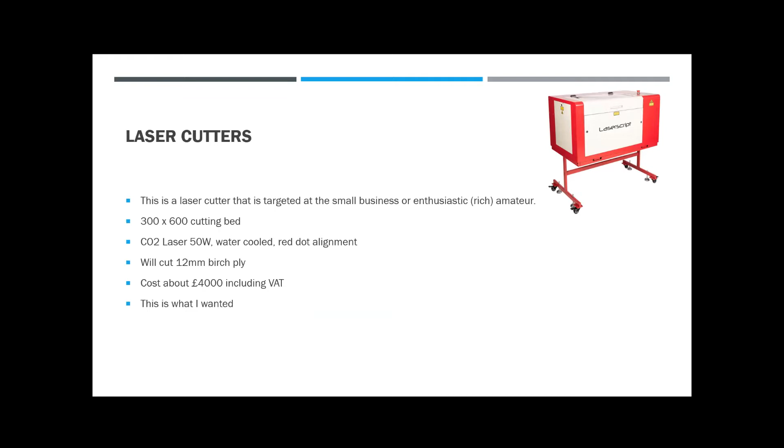Right, laser cutters. It happily cut 12mm birch ply, and it cost about £4,000. And I'm sorry to say that comes in out of my price bracket range. That's what I really wanted. That's what my dream was.

And this is what I got. It's got actually a bigger cutting bed. It's got 500mm by 600mm bed. It's got an LED, and I put in quotes, laser diode. There's no such thing as a laser diode. It's just a very, very, very bright diode, but it is not a laser. It's 3 watts power. I mentioned that these things arrive in kits, so you've got to put them together.

Without instructions, it didn't take long. It took me a couple of evenings, and it's very simple. It's what's called an XY frame. There's a head on it, which you can see in the center of the frame there, which carries the LED laser, and that runs along the rail on the top, that's the X-axis. And they've got the 2 rails aside, and that drives the Y-axis. It's a two-dimensional laser cutter, and that's what I got.

And I put it together, and I had a play with it, and had a bit of fun with it. But I was having a lot of problems, and it wasn't straightforward. Now, this is the difference. This is the £4,000 difference between the two.

An expensive, proper laser has a fixed laser source. It's basically excited photons held in a CO2 plasma. It generates a highly intense parallel beam of light, and it's basically reflected off a moving mirror. So basically, your beam comes out, hits the mirror, points down, and it basically cuts in a very parallel beam, a very narrow parallel beam through your piece of wood. The width of the cut is probably about a quarter millimeter.

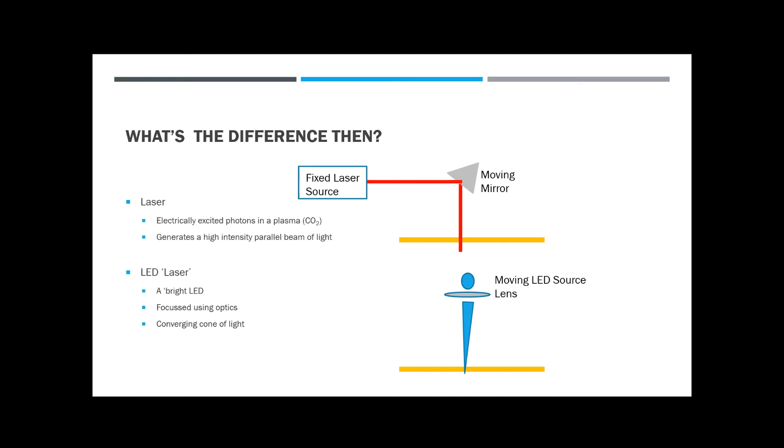So getting this thing going, well, it arrived as a big box of metalwork and plastic and things like that. These things usually are very nicely all CNC cut. And it took me a couple of evenings to put it together. And when you get it, you actually get a nice piece of software which allows you to read an image, for example, like from a PDF or from a JPEG, and it will burn it onto a piece of plywood or something like that. The picture, it's an engraver.

It basically engraves an image pointing from the image that you selected through the inbuilt software. The problem with that is it's not really much use for CAD type work. Now there's GRBL, we'll talk about GRBL over and over again today, but GRBL basically is the software that actually sits on the laser cutter itself.

And it's important because it actually talks in a language that can be spoken to by a CAD program, using something called G-code. Now I'm talking this backwards, don't get hung up about the names if you're not familiar with this, it doesn't really matter at this moment. The important thing is that we had to upgrade it so that the firmware was running GRBL.

I then took it apart. It was a bit too big for what I wanted. I haven't got much space in my shed, as I've got to walk around my shed later on. So I cut it down, so the bed size was now 600 by 300. It fitted a lot better.

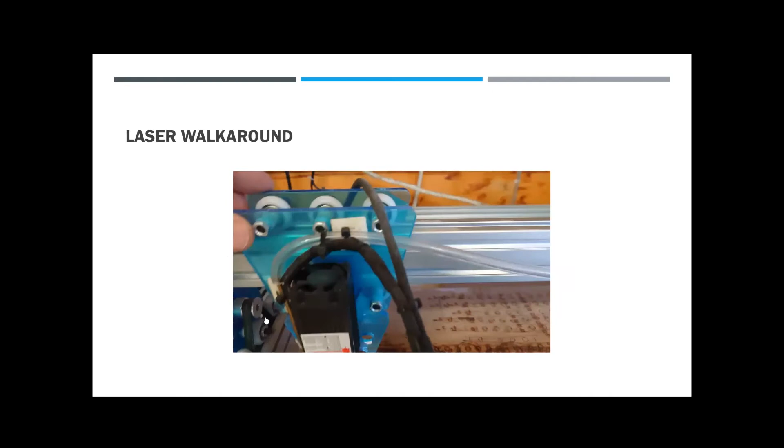Can you hear the audio? Yeah, we're still on your PowerPoint at the moment. Yeah, we don't have the audio, Martyn. Sorry, say that again, Graham. We don't have the audio. You don't have my audio. Is the volume up, Martyn? I'll walk it through, you can hear me, so I'll walk it through myself.

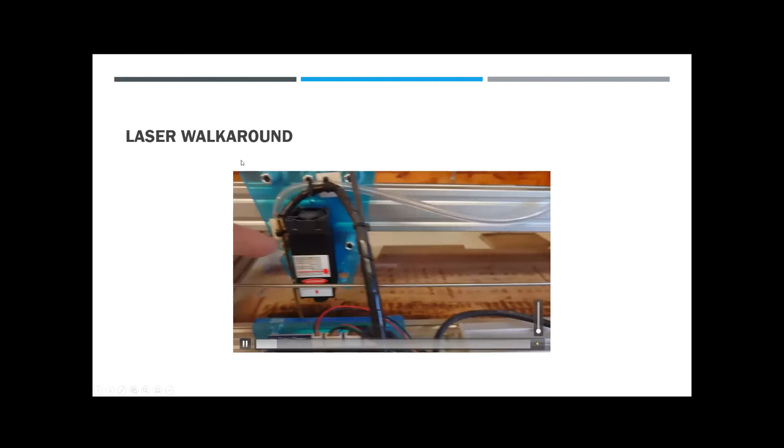Okay, we're basically up to, I'm making a walk around to see what it looks like. I'll just run backwards so I can talk it through. It's an Arduino processor, I'll turn the audio off here. Basically what it does is drive the 3 stepper motors, and it drives the laser head there.

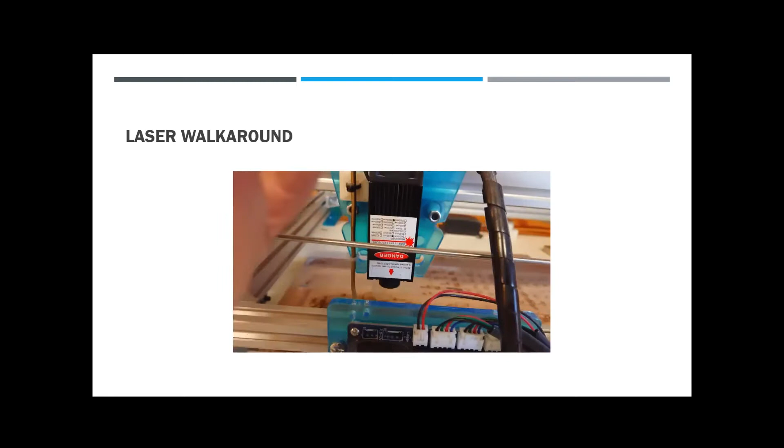The laser head goes down to that silver box you saw before, and there's a laser power supply, and the area there is now a stepper motor. It works on a carriage that drives across the X-range on this aluminium channel.

What you probably can't see from there, but I'll show you in a second, is basically it sits on a series of pulleys, so it runs very, very smoothly. And there's a belt that drives around it and goes around the pulley underneath it, which is round on the stepper motor, so it goes backwards and forwards.

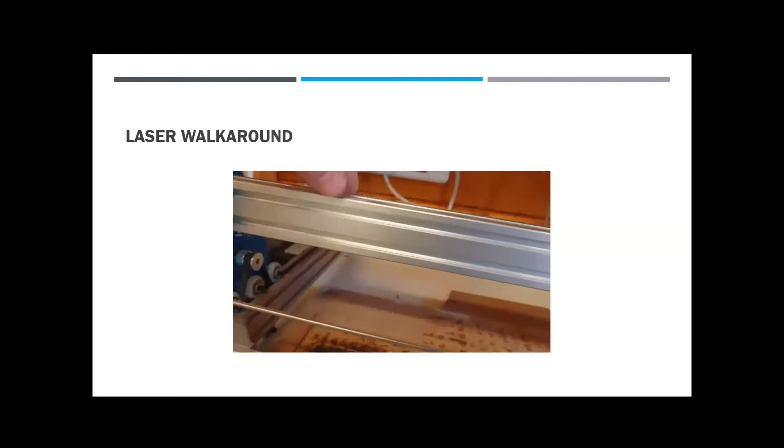Looking at there's a stepper motor for the y-axis, a stepper motor at both ends. You can see the tooth belt, although it's pointing downwards, goes round the pulleys, round the gear wheel at the top, down through the second pulley, and goes through the ram. So it then moves backwards and forwards, which I'll show you in a second.

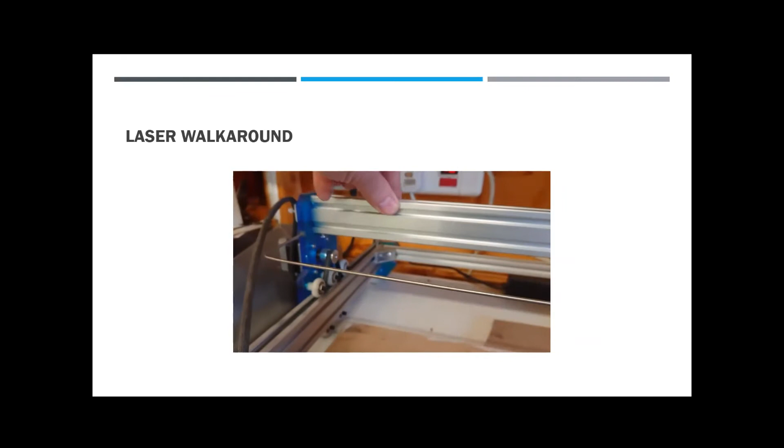Okay, and while it's doing that, there it goes, backwards and forwards, and you can see the stepper motor would drive it across. The stepper motors have very fine steps, probably 1/10 of a millimetre per step. That's showing you the other one. The bit of wire you can see there is my very crude cable guide to stop the wires falling in front of it.

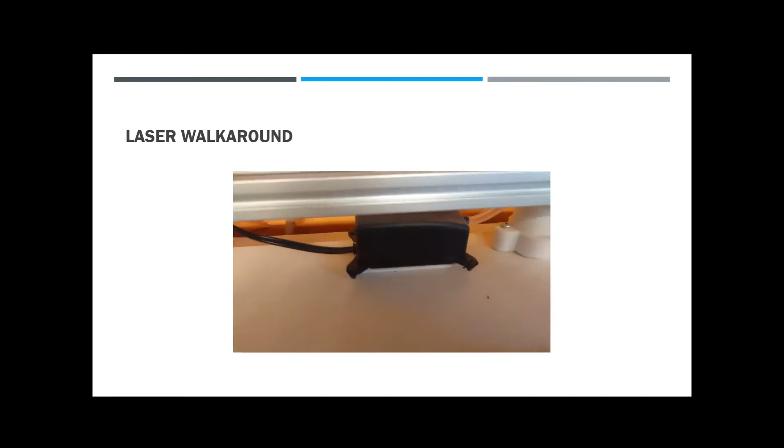At the back there's a little fish tank aerator, which has cost me a couple of quid, £3.50 I think it was, from China. It blows a very minute amount of air. It's called air assist in laser parlance, but much more. Blows the air down this little air tube.

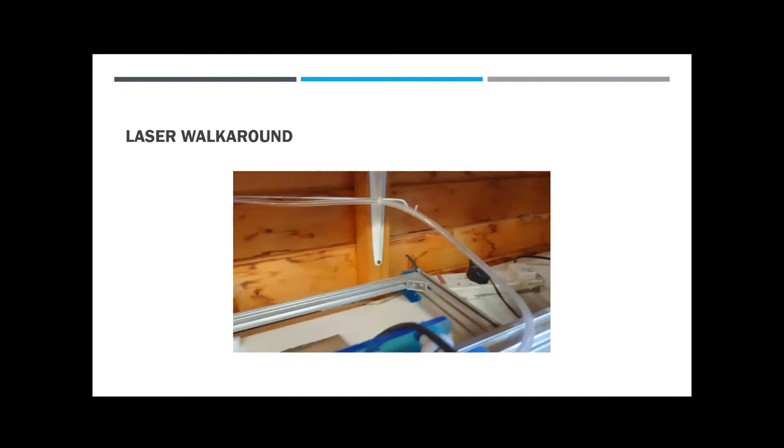I've got a 3D printed little pivot point down there, and it comes down through the brass tube, and it blows air out just in front of the laser cutter point, and it clears the smoke very, very effectively. It really does. It's so effective, if you're cutting tissue, it'll blow the tissue away. So it doesn't need much of a waft, but it's still quite effective.

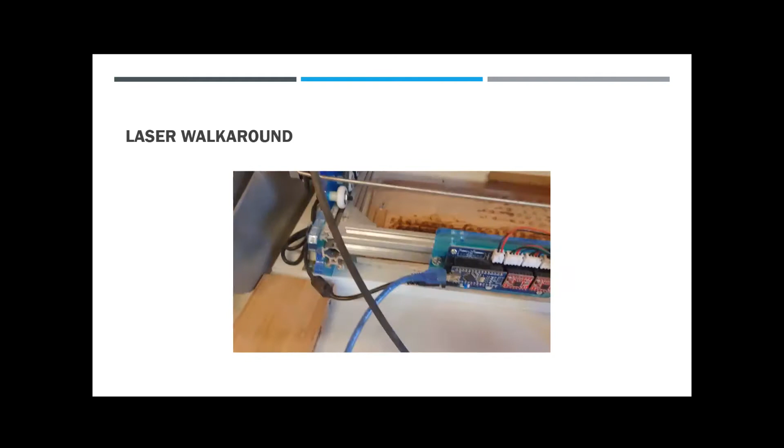And that's it. It's really, really very simple. The important thing to realise is there are no end stops on it, no micro switches showing which the home positions are. You can see at the bottom on the sacrificial board, I've actually used it quite in anger, and you can see I've gone quite cleanly through the balsa without any problems at all. It really does work quite effectively.

So really that's basically about it. It's connected to the PC through the blue cable there. This is a standard USB cable. The PC's there, you can just see it on the desk in front of me. And roughly that is just about it.

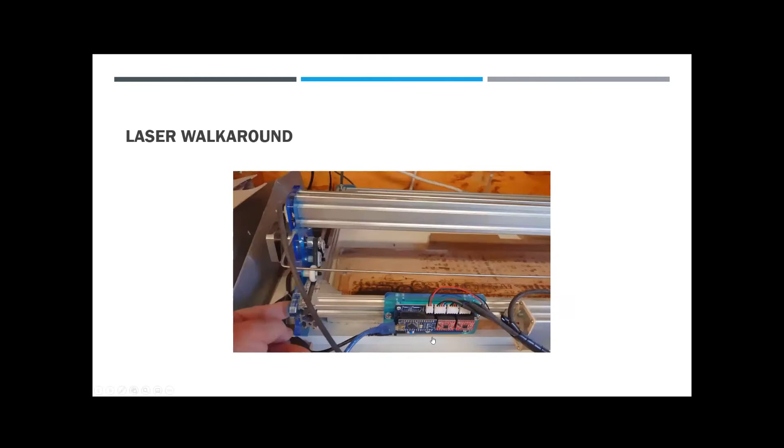And I can't think of else I'm saying now, so it can't be that important. I've covered most of the points. So I'll kill that one.

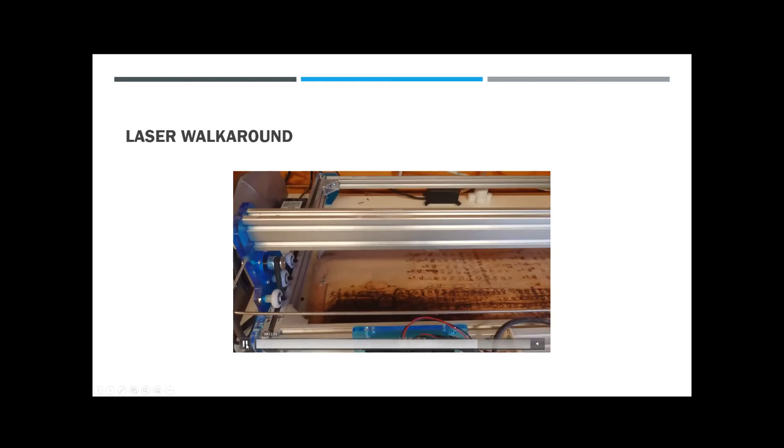Was that come across all right? Did you get the video okay there? You can nod, shake your head. I don't mind. Yeah, great stuff. That was good. That's great news.

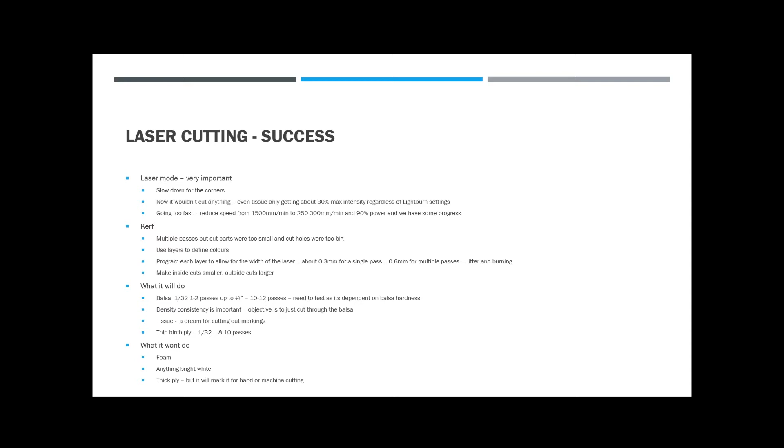So there we go. Moving on, looking at the software.

First of all, let me have a quick pause for breath. Any questions anyone would like to ask me about setting up a laser? We'll come back to it a bit more later on, I'll cover it, but if anyone has burning questions, fire away. Now's a good time before we get into this.

No? Martyn, you talked earlier on about using the GRBL language to get the Lightburn program to talk to the laser or the diode cutter. Could you just go over that a little more slowly, please, as to what the problem was and what you had to do - not in detail, just a bit more slowly so I can understand. Right, like I said, I'm struggling to hear you a little bit, Doug.

But on the laser, when you get the LED laser head, it comes with its own lens, and that's all I've used so far. Focusing - there's a focus option in the software which will actually bring you down to a point. You look downwards and get the smallest point you can find. Am I on the right wavelength here, or have I missed the question completely? No, I think you're going the right way. Okay, there are other lens systems you can buy for it, but I haven't experimented with them yet - that's something I'm looking at. Right, okay, well you've got your sharp point there.

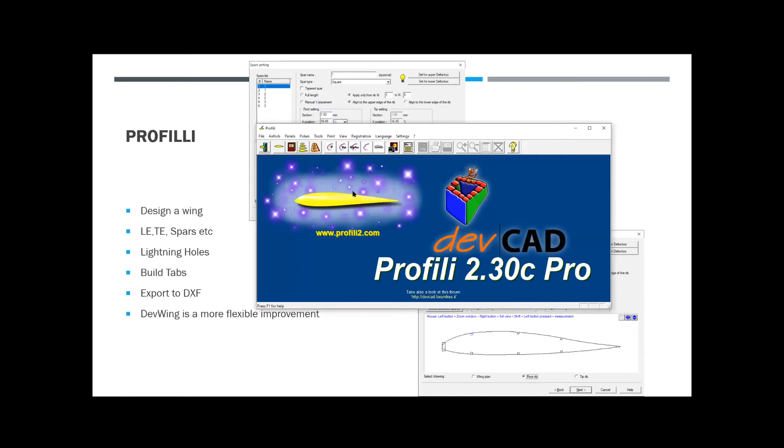Right, can you see the DevCAD? Yep, we can see that. Yeah? Yep, great stuff, that's right.

So here we are, we'll start off with that. I'm going to pick out a panel that I've used. Those who've been following the Big Firedoll's cook-up on Hip Pocket Aeronautics will be aware that I'm building a Bok, a Russian 1938 design. So I'm going to use this as a sample.

It's a peanut model - a big peanut because it's got no tail. It's a tailless model, and I thought that looks like a bit of fun, so we'll open this up. These are all panels I've designed and built over the last few years - there are quite a few in there. I'm quite familiar with this, and it's a rib panel.

You can do foam panels as well, by the way, and it'll create templates for a foam cutter if you want to use it, if you've got a foam cutter.

So we'll start with the Bok 5, and it's a tailless aircraft. What you do is you put in your panel length. It's 185 millimeters long - this is half a wing. The root chord is 152 mil, the tip chord 52, and we've got 100 millimeters of sweep back.

I'm actually building in 3 degrees of washout, and the program will do all that for me. I'm not going to change anything, I'm just going to walk through the steps to use this.

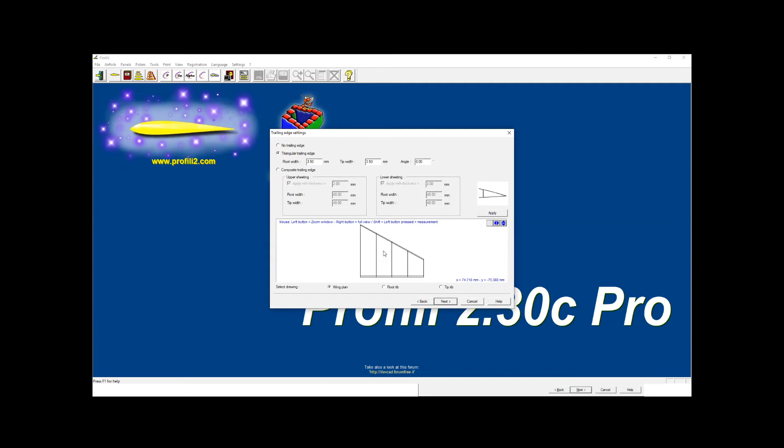Moving forward, I want a trailing edge on this. Now, the original trailing edge, which was a big mistake on my part, was a 3.5 millimeter wide triangular trailing edge, which is really far too narrow for this section and the size of this wing. You can see there's a tiny little triangle at the back end, which is roughly the trailing edge - it's a bit of a nightmare to try and keep this wing flat. A bit better on the wingtips, but too small at the root rib. But again, I was trying to follow the original Bok 5 plan, which you'll see later on.

We've added some spars - I've got 6 spars in this. I basically said I want them to go from rib 1 to 5, but on 2 of them, which I think is 5 and 6, because the wingtip section is a little bit narrow - there's a little bit of a gap in there.

Now, what this does is it actually draws the spars all the way through, even though we're only looking at the tip rib - I've actually stopped it at rib number 4. So that one is 4, you can see that's 5, that's 4, so that one and those 3 I stopped. It's just too thin at the wingtip to have a reliably supporting wingtip, because it's got to hold the tip shape itself.

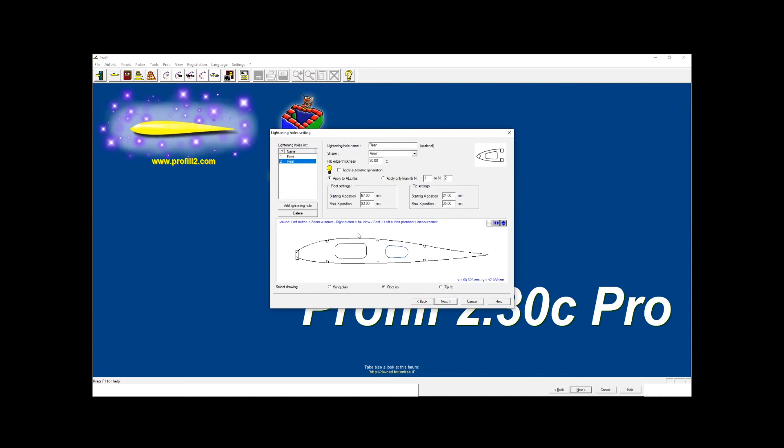I can put lightning holes in. This is one of the great benefits of this - the lightning holes are actually quite useful. We're talking about indoor models now, and I've no problem putting lightning holes into a piece of wood. I've tried building models with wrapping pieces of balsa in an arc over a sub-spar, and I never got on with it - I found it a real problem. But I can set the size of the lightning holes, and that's how I did it. I'm looking at keeping an edge thickness at 20%, so 20% of the thickness of the rib at that point, meaning 60% of that is a lightning hole, same at the back. I can set the start and finish position and so on.

This gives me something with a bit of stability around where the spars will be, and it adds a little bit of benefit. Again, looking at the tip section compared with the root. Moving forward.

I didn't put any building tabs on this. If I wanted to, I could put a building tab in, one right down lower, and I'll put a building tab in there. You can see why I didn't bother, because it would be so narrow. The building tab is, of course, very, very handy for making sure the wing stays flat.

Bear in mind, this has got 3 degrees of washout built into it. So the rib at the center section actually has a tiny building tab on. At the tip, we've got 3 degrees of washout built in, so it's actually holding up by 3 degrees. I think that makes sense - I hope so. But that's where you put the 3 degrees in. I didn't bother with this though, so I propped the washout up myself. It just wasn't worthy of it for 5 ribs.

And that's it, you've done it. You can now have a look at what you've just drawn. I've done this one before, and I can now see there we are with the 5 wing ribs. This one, because I've mucked around with it, you can see on the top up here that I've got 3 spars there, where I've got 6 spars at rib 4. So that's where it's come through. And that's it, done. I've just designed a very simple wing - very simple, very straightforward - and it works really, really quite well.

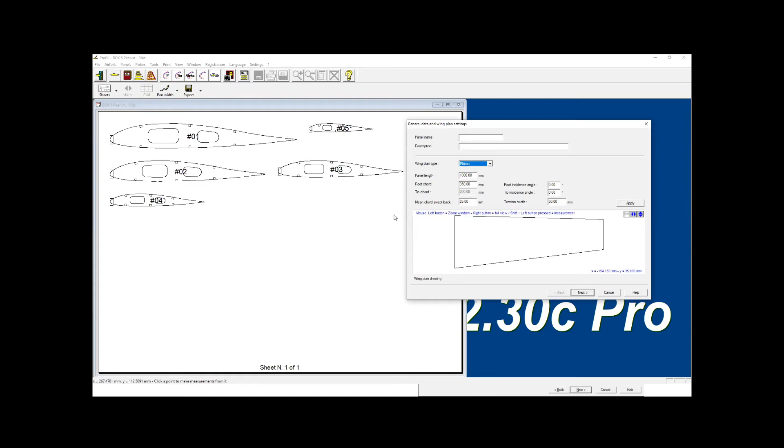I don't know how accurate that would be. I haven't tried it, but I have done elliptical planforms before. You can do ellipticals, but they are pure ellipses. No, I'm not going to do that now - that's for another time if you want me to do that.

So I'll abandon that - that is basically PROFILLI. Close that down, get rid of that, and that's gone. So we've got back onto this one, and we've done PROFILLI.

So moving forward, DEVFUS. Now DEVFUS is another one from Stefano's stable of applications. He's basically got a CAD suite, which he promotes, and all these applications integrate very nicely into it. I never got on with his basic CAD applications - I've always preferred AutoCAD because I've been using it quite a long time. I find it, probably like most people, very difficult to change from one system to another. It's like trying to fly mode 2 and then expected to pick up a transmitter and fly mode 1. Some people can do it, some people can't.

So this is what this is. Now this is again part of the DevCAD suite. It's all about fuselage design, and this is very, very much more sophisticated than PROFILLI, even though it's from the same stable. You basically build a structure. It's quite intuitive how to use it. So let's have a go with this.

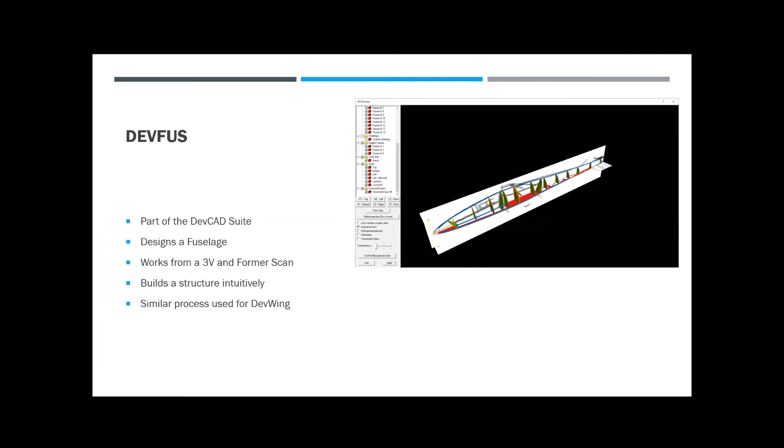This is - here we are. Again, I've been playing with it for quite a while now. I've got one or two bits and pieces - I've got the GAL 56 in there just to show what the fuselage looks like. And you can see the wing section I was using before for the Bok.

But we're going to go with the Fokker. The Fokker is a quarter scale glider I built. It took me about nearly 2 years to complete it. No, I wasn't working on this the full time - it's one of these things I kept picking up and putting down and picking up and putting down, as modelists tend to do.

But it unfortunately had a very sad ending when the half-inch carbon wing root joiner failed while I was on an aero tow. I got catapulted into space by the tug, and the wing joiner failed. The wings didn't fail - the wings were fabulous. The joiner failed when there's impact on carbon - they don't like it, and it came in from 1,000 feet. A 5 kilo glider went down into a field of maize. It took me a week to find the bloody thing. Never mind anything else - but anyway, that's my confession for today out of the way.

We're going to walk through this one, so we'll do a double click on it. I'm going to move this across to over here - we'll start off with it. Things are a little bit more important now. We've got a project name, which is Fokker 4, a fuselage length, and this is taken from a 3-view which I've imported to CAD. So I've scaled the 3-view up - I'm working with a small 3-view, but now at nearly 4 meter span and 1.7 meter long.

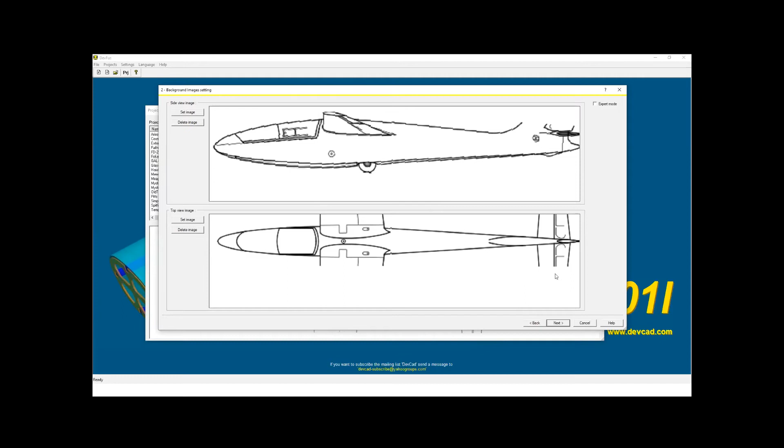And then what you do is you basically trace it. I went a bit quick through - I'll go back again. You edit the outlines graphically, so what we do is draw lines around this. We put these little blue anchor points around the line where we want them, and we see the blue dotted line going across. The red line there is the datum point.

And underneath here is a skid, by the way, that's why I've ignored that. So that's the side view, just drawn out, including the tail cone. And then looking from the top view, I can do this only on one side because it assumes the fuselage is symmetrical - so if I pull this pointer here, you can see it bends both sides. Okay, so that's all you do.

You just drag them, move it to about there. That looks a bit better. We've now got a line there.

If I've got an awkward shape, I can add some more anchor points in and move them in, or I can put right angle points in. These ones at the back end are right angle points. So for example, here at the nose, to get that sharp curve, it's a right angle point.

You can see I can alter that, and it very nicely moves the shape, moves the position of the curve so it follows the curved line. It's a bit like a French curve, probably the best description I could put to it. It takes a little while to get used to working it, but this is quite a simple shape, and this is why I've chosen this one.

The gull was really quite difficult to do. It was very, very complex.

So we've agreed that we've now got our lines drawn into that, so we move forward and we're creating a 3D preview. I'm not going to bother with 3D view. We're creating a set of formers now. What I did was then get a set of formers.

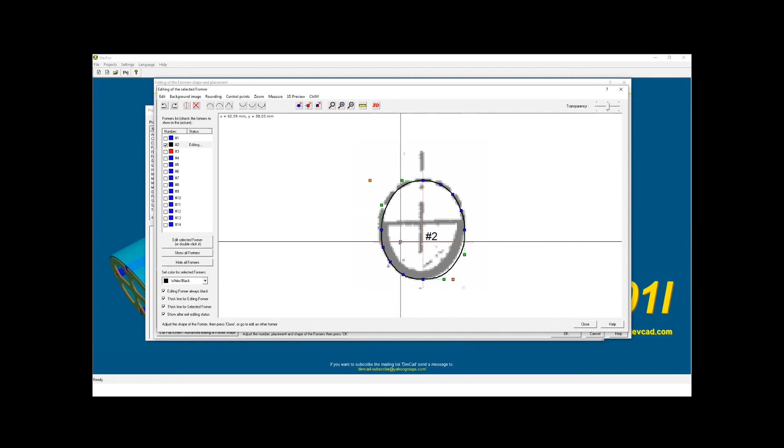And you work your way through this. Now, I put, I think, 5 formers in there, but I actually specified I wanted 14 formers in place. And what it does is actually interpolate the shape of the formers in between, so some of these that I've created have actually been created by the software.

So it's really quite nice and quite tidy the way this gives you the cross sections all the way through in far, far more detail than you'd ever get from a 3 view. And you get a feel for it, so you know whether it's right or wrong.

So we've done that, we've imported the formers, we've drawn around them, and we've now got a shape that's in 3D. We can look up here, there's a 3D switch here, and we can have a look at it. I'm just going to bring it up, drag this up to the top. Okay, and here we've got the formers in place.

You can see my top and my side angle, and if I turn the raster plans on, if I say put the formers on, there's actually more than I thought on this. So I'm turning it on, you can see now which ones I've actually used to generate the manual ones.

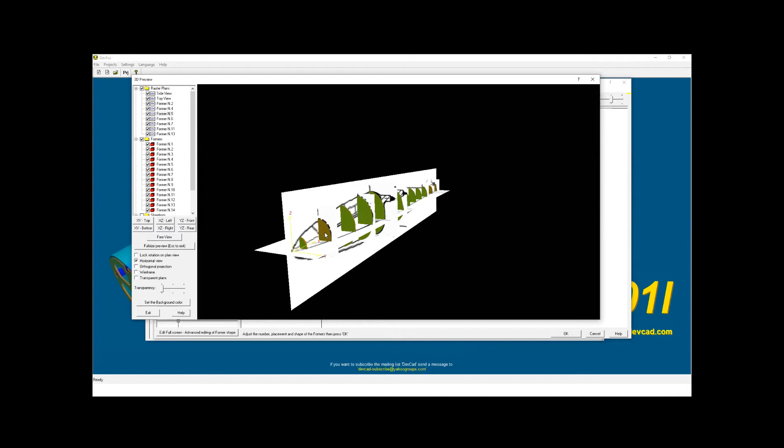So that's a manual one there. So turn the formers off, you can see them there, those are the cross sections which I worked from. One at the tail, one just in front of the tail plane, then we've got the 3 around the wing section, and then around the front, around the cockpit and to the front.

So we'll turn the formers back on again so we can see what we're looking like. And yeah, to me that's looking pretty good. Certainly for the level of scale modelling I'll do with a quarter scale glider, that's more than good enough. I'm not thinking this is ever going to enter a competition or anything like that.

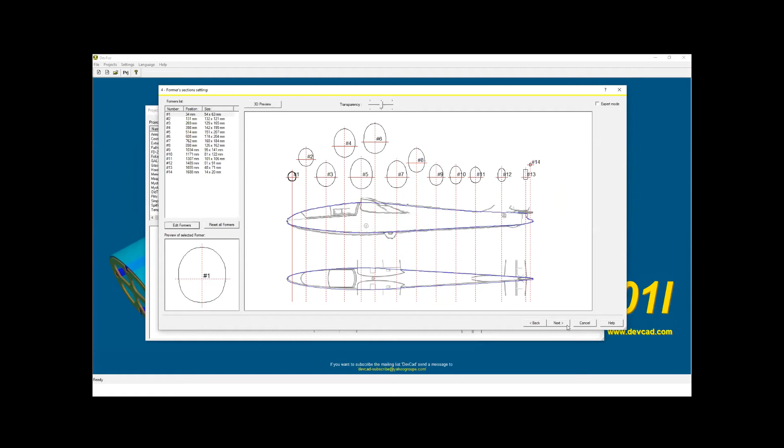So we'll get rid of the 3D view, click OK to that, and we'll move forward. Every time it's updating, regenerating the 3D view. Now, we want to set the former thicknesses here. It defaults to 3 millimeters, 2.5 millimeters. They're all 3 millimeters, except this one here, number 6, which is where my wing joining tube will go.

And it's 12 millimeters, so I'm going to put my wing joining tube slap bang through a former, so it holds it nice and rigid. So there we are, quite simple, straightforward.

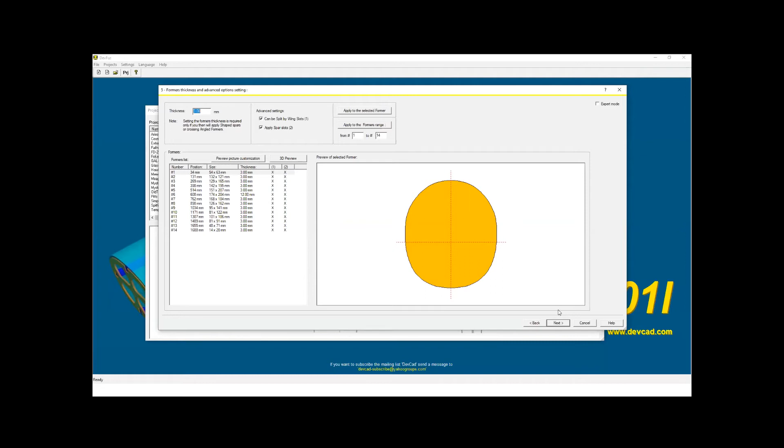Then we're going to put some sheeting on this now. Again, we've set the width sheeting. I decided to go 3 millimeter balsa. It's probably an 1/8 balsa, which is slightly more, but by the time I've sanded it down, it'll be a bit narrower than that, and it's just a uniform thickness. You can do all sorts of clever things with this by the setting about it - you put tapered sheets in here and there and everywhere. But again, not for today, not for today.

Again, you can look at the sections all the way through, what the relationship is, so you can see it now coming together. Okay, at the moment, no cockpit - we'll do the cockpit and the wing section later, in a moment. Moving on.

So, let me just have a quick sip, if you don't mind.

Okay, what I want to do is put some angle formers in here. Because my cockpit area is angled, I put in a pair of angle formers. So we're doing the setting now with the boundary of the cockpit front and back. And also I put a former here, behind the wing, linking the wheel area, and it's just adding an extra level of stiffness in that area which I wanted.

Bear in mind that the wing joiner is sitting through number 6, and it just adds a little bit of stiffness in that area, so you can see what happens - it actually calculates the shape of it. So there we are now with number 1. It knows it's going to cross through former number 2, so it cuts a slot at the right position. Now, I don't want the bottom bit of that former, I just want the top bit, so I'm going to cut it nonetheless.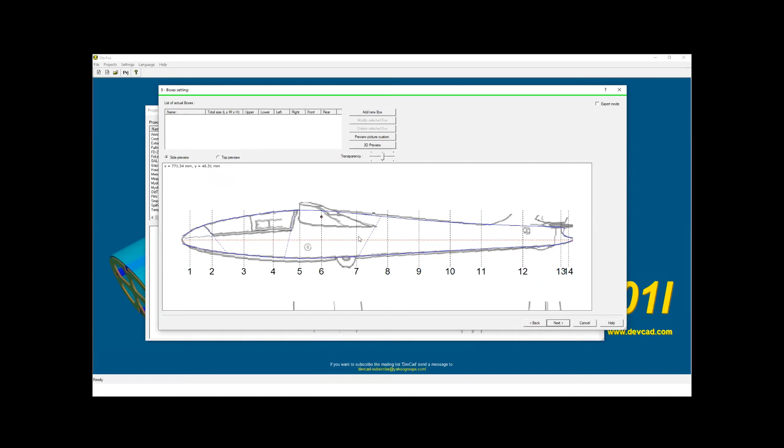Moving forward again, we're moving slots, lateral sides form across there. I'm not using lateral sides in this because I sheeted my thing top and bottom, so I don't have to worry about putting fuselage sides in. But it will still calculate a hypothetical one, and you can see it sees a very tiny side that it could generate if you wanted it. I'll just ignore it, I don't need it.

Lightning holes - why hasn't that come up? Oh, that's the lateral side, sorry.

Right, next thing to do, we're putting quite a few stringers in this now, or he calls them spars. Basically what you do is use the generic spar generator. I'm not going to create one, but we'll just add a generic spar. Where do I want to put it? I'm going to put it slap bang in the centre. It could be quite useful, because if you want to build a fuselage around a tube, for example, to keep it nice and straight, this is how you do it - you'd put a spar down the centre and build it around a tube, so you get fuselages absolutely bang straight all the way down the length of it.

And what we can do is set the size of it, or you can put it on the edge - it tells you where you want to put it. You can line it on the upper side, the lower side, the left, the right, on the outer contour, the inner contours, and so on. Loads of places you can put it.

So I'll cancel that one - I'm going to create one and look at this. I've got one on the top. Let's pick one somewhere in the middle, so this is former number 4, I think. I'll click then. By the way, it's got dynamic measurements all the time - I can measure something. By left click and shift, I can measure something across - 134.97 millimeters.

So on this one I've got a top spar, a bottom spar, which is going red - you can probably see it. If I just zoom in a little bit - there we go, we've got a left one. It goes back every time we do that. Then the left mirrored, so it's the right-hand side for that one.

We've got the cockpit left. What I did was put a spar in to define the bottom edge of the canopy, so the canopy now is defined left, right, front and back.

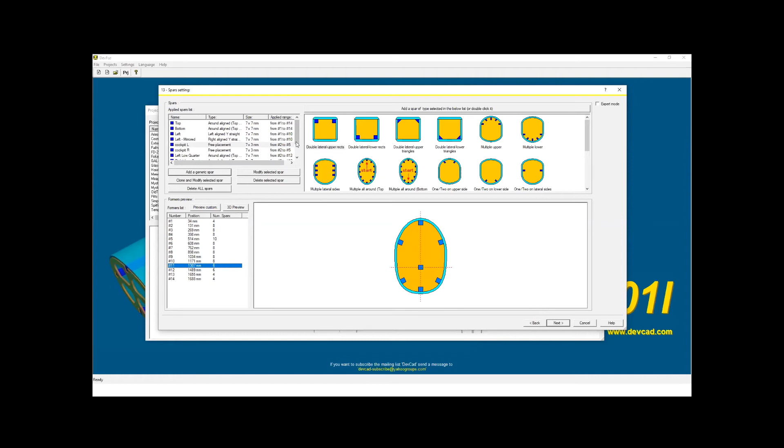I'm not too sure why I've got that one in the middle, but I'm not too worried about it - I'm not going to worry about it too much anyway since I'm not going to finish this. Moving forward, so we've got that.

Vertical decks - you can put a deck in vertically. Vertical and horizontal decks are great for building a structure inside, and that will then generate the structure around it. No vertical decks on this one, but I do have a horizontal deck.

I put a horizontal deck in which starts at 1 and finishes at 12. Let's have a look at it - it's there, and if we look, I've applied a lightning hole to it. This is what the deck looks like - it's calculated and shows you where all the formers are positioned.

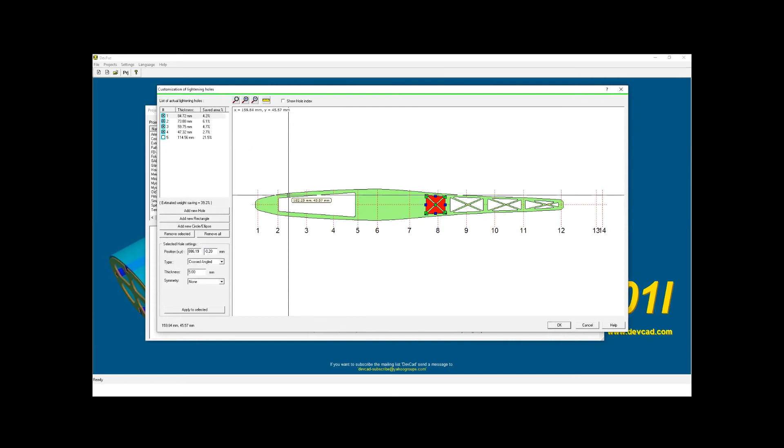I put a lightning hole there for the cockpit area, and since I don't want a load of weight in the tail, I put a pile of lightning holes in the back. If I want to add a new lightning hole, I can do that - you basically just drag it into there, for example, put it central, and there we are. So you can create the holes, stretch it, pull it any way you like. Makes life quite easy - very elegant the way it generates lightning holes.

We'll cancel that one, I don't want to do that. No, I don't want to do that - leave that, just click OK. We'll come back to it later. So that's basically a horizontal deck.

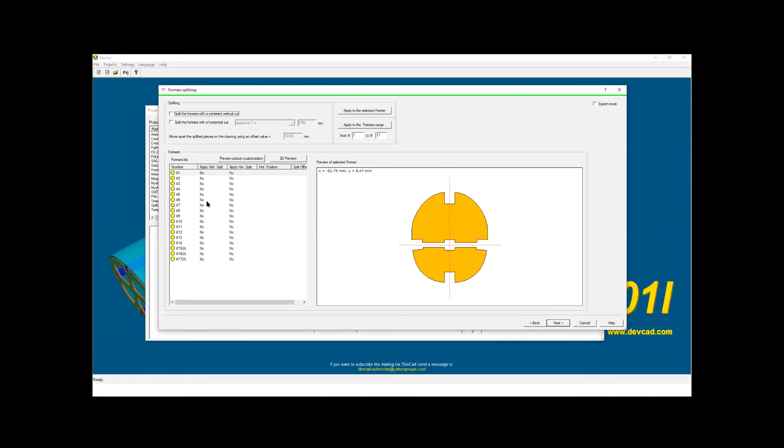So what I've done is let it generate the lightning holes in much the same way Profili did it. It basically puts it in with an offset, so 10 millimeters all the way around, which is the gap. These are all going to be cut in plywood, so I'm not too worried about the fact I've got quite big holes in there. We're trying to take as much weight out as possible.

I think Richard Krapp must be loving this conversation.

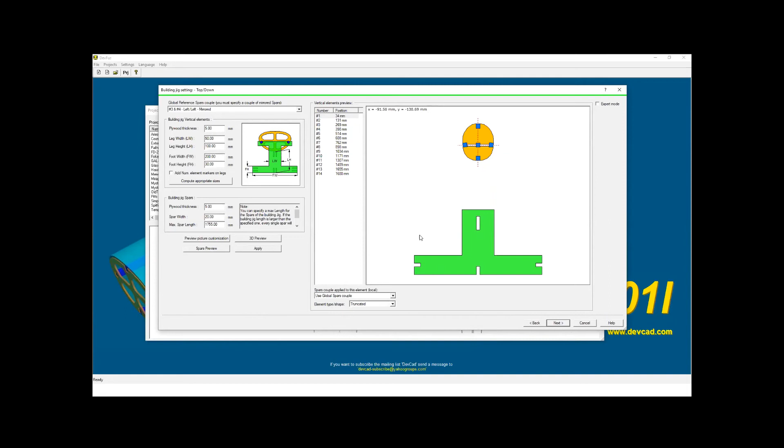And then that's it, we can have a look at the external shape. We'll bring this up to the top, so now we can put the sheeting in place and see what it looks like all the way around. We can hide the sheeting, make it transparent, so there we are, you can see through it. Now you can see what the structure looks like inside.

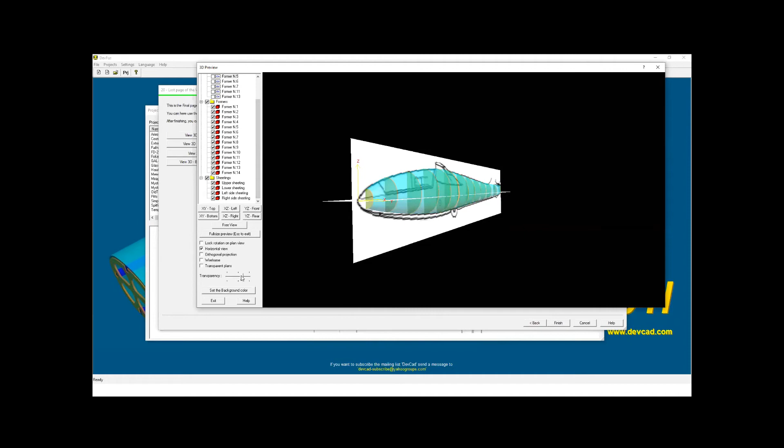What I haven't got in there for some reason is the decking. I can't remember where that's gone to, but I'm not going to worry about it at the moment - decking should be there somewhere. I'm not sure why that's not there, but we'll have to look at it. But that basically shows you it all around, still with the views in place, and that's all I'm going to do with it.

So I'll cancel that because I don't want to change it. That gives you a very quick view of DEVFUS, and it's taking a bit longer than I thought it would do, so we'll cancel that, come out of it and move on to the next one.

Am I driving you cold here, or leaving you dead, or are you okay? Thumbs up if you're happy. No, happy - completely different from what I've seen before, so understanding it better now.

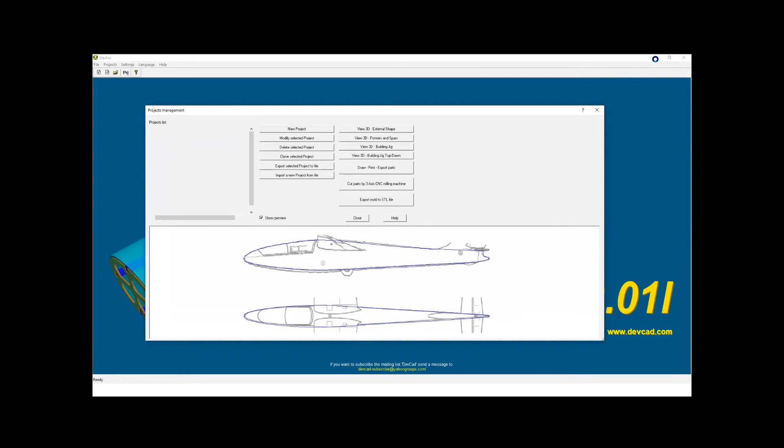It's hard work, I'm trying to keep this going fairly quickly because I'm conscious of the time. That's the reason why. Right, so we're back to the start from there, we'll get rid of that one now - close that and close that, and moving on. Okay, AutoCAD.

I've got AutoCAD set up here. I've used AutoCAD for years, then I went on to a free version of AutoCAD which then became chargeable, and then I found a free version of AutoCAD online. I'm not going to publicize it because it's a pirate copy - so this is a pirate copy I'm using. I shouldn't admit to things like that, but now I'm no longer a practicing IT professional, I can say things like that. But what I'm going to do is just basically show you very quickly what this looks like.

Those, by the way, in front of you are the cut parts I did for the BOK 5. So, right, sorry, I'm getting my breath back. So here we go - why hasn't that gone up? Okay, here it comes, right, here we are with AutoCAD.

There's a 3-view that I've actually already imported - this is the plan I'm working on for the BOK 5. It's one of the weirdest little designs I've ever seen, and I like weird - weird and me go well together. Too weird, my wife would say, but there we go. So what it basically is, this problem with this was that I wanted to cut the parts out using the laser cutter, and I wasn't really happy with the wing.

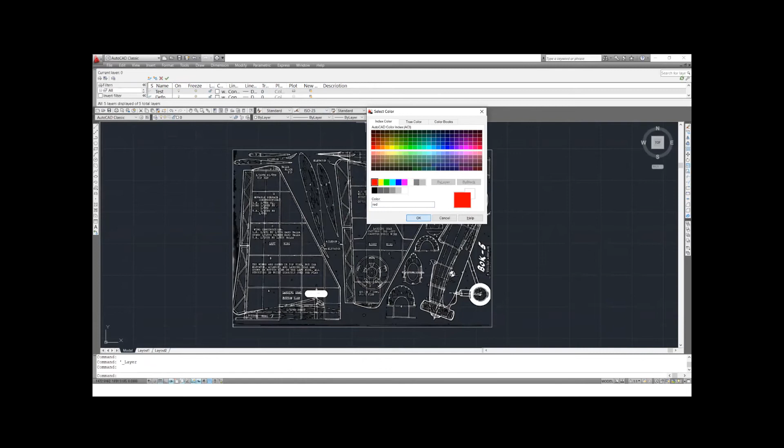And what I'm going to do is give it a color. It comes up in a color picker like this. We'll pick one that's easy to see online - we'll go for red, because I know you'll be able to see it. And that's it, we're going to make that one live. So we're live with that drawing now.

Down the side of the CAD we've got a small toolbar. We're drawing a straight line, so we'll pick a straight line and draw it over there. And like that - if I picked the wrong layer, unfortunately, I should have done the layer. Amazing when you're trying to do things. Escape that, we'll go back and pick my layer out.

Sorry, what would I be doing while I'm in the drawing mode? Here we go, so what I want to do is pick - where's he gone? Apologies, what I want is my layer called test, that's the one I'm using. So we'll select that one and we'll draw a line.

Draw a line now - well, I should have a red line. There we are, we've got a red line. Okay, so that's basically that. We're drawing two straight lines. It's as easy as that.

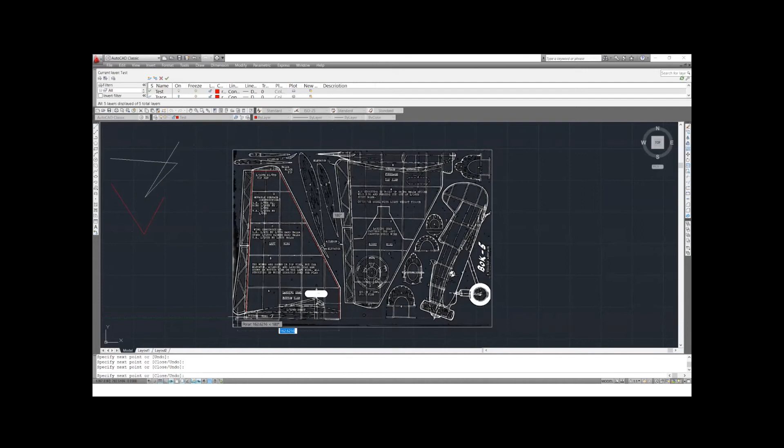So I can now, if I want to, draw this outline very quickly - pick out the point there, up to that wing root there, down to there, across down the centre section to about here. I'm doing this very roughly; I normally zoom in and get spot on. So I'm zooming in to see how accurate I am - I'm not a million miles out, but it's okay. And that's great for drawing straight lines.

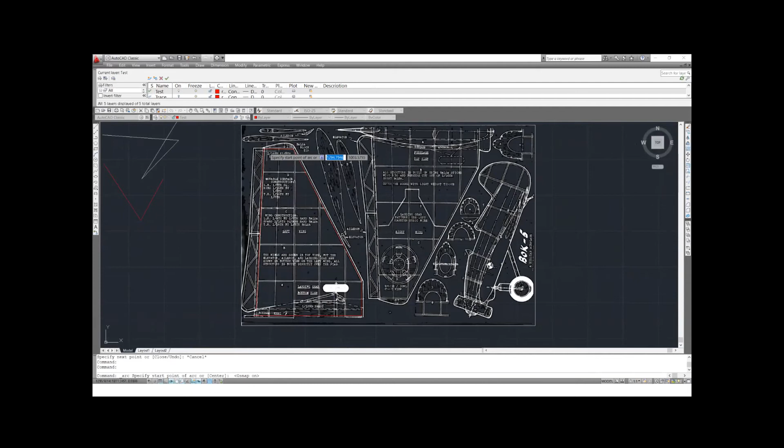If I want to draw a curve, I pick out this other toolbar, called Draw an Arc. Now this has got a nice little feature in 2011 - I can click onto an object, so I want to click on that there, starting from that point. I'm going to zoom into this bit so you can see clearly what I'm doing. Now you can see this is a rasterized program - I'm not going to follow this line exactly because I didn't get it accurate, but we'll say we'll start from that point.

That's the midpoint of the arc, and then we'll do the second point - then we're drawing a curve. And then we repeat the arc again, picking up from the last point, coming round, and drawing it round to there. Then repeat the arc again, and round again, and so on.

You can see what I've drawn, although it's not actually on top of this - I normally draw it straight on top of the line. I've actually drawn a wingtip in three arcs. Can you see that, is that clear enough? Yes, okay, so that's basically it.

Now the question is, though, how big is it? The point about CAD is you don't actually draw to scale - you can if you want to, but you don't need to. You always draw full size. So if you're working on a glider with a 20-meter wingspan, your wing would be 20 meters. The fact is, you've just zoomed in on it.

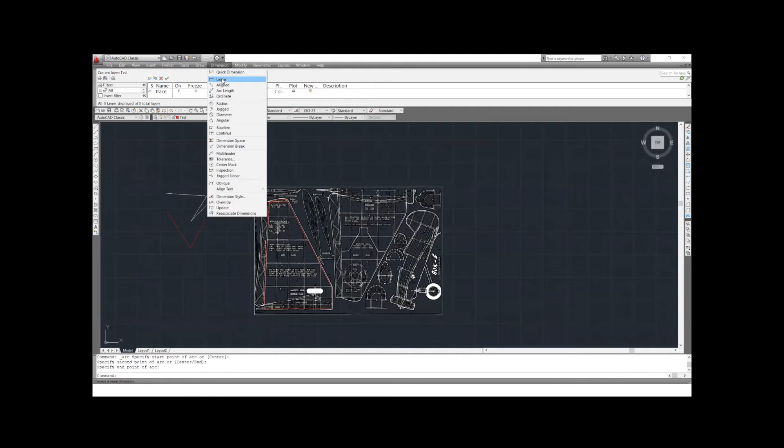So I've got one here somewhere called dimensions, I think - if not, we'll create one. Let's do a linear dimension, and we're going to measure from that point there to that point there, and we'll zoom in. Oh, and that's 152 millimeters. Now, I think that's a bit small, to be honest with you.

I actually want to see this, we'll keep it nice and simple. We'll make it 608 millimeters chord. It's going to be a decent size. I fancy building this for a scale model.

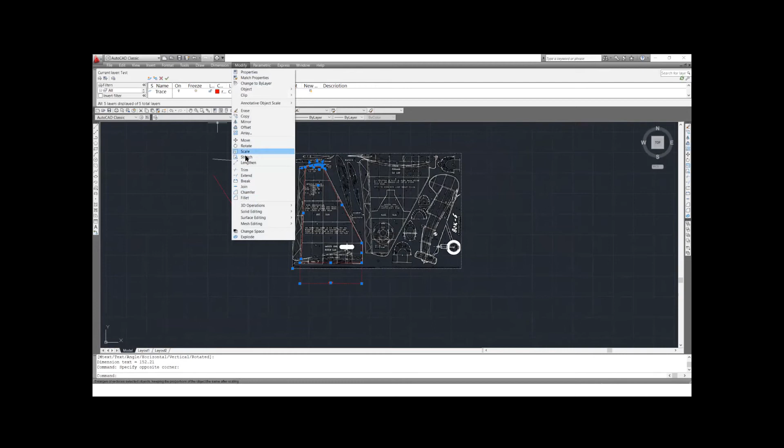So what we'll do, we'll select everything like that. So that's everything in that box is now selected. It's got dotted lines around it, all blue handles on them. And we're going to modify it, basically scale it. We're going to stretch it from this point here, and specify the scale factor. I'm going to make it 4 times bigger. And now we've got somewhere out here.

Oh sorry, is that view, zoom, extents. And there we are. Now I've come down to this. It's exactly the same picture, exactly the same drawing, nothing's changed, but my dimension is now 608 millimeters. So very quickly and very easily, I've taken a small 3 view from which we all work, or a small plan like this, and made it very, very much larger.

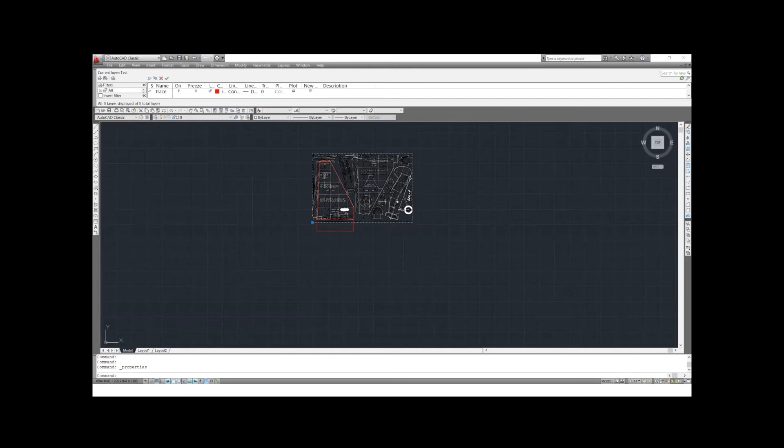The other thing you've got to be able to do is import the drawing. Now this is, if I look at the properties of that, you can see, if I bring this over here - it keeps popping up on my other screen, by the way, this is why I've got to let it come across. Come on, here we are. It shows you basically the PDF underlay, it's called, because it came from a PDF diagram. And it tells you where it is. And all I do is, it's there.

So if I pull this out, it will let me. Okay, it's telling me it's in my Martyn folder, Aero Modelling Scale, Free Flight, Mooney, the Bok 5 Plan PDF. And I just imported it from that, simply by using insert a PDF underlay. Okay, it'll ask me for the path over here.

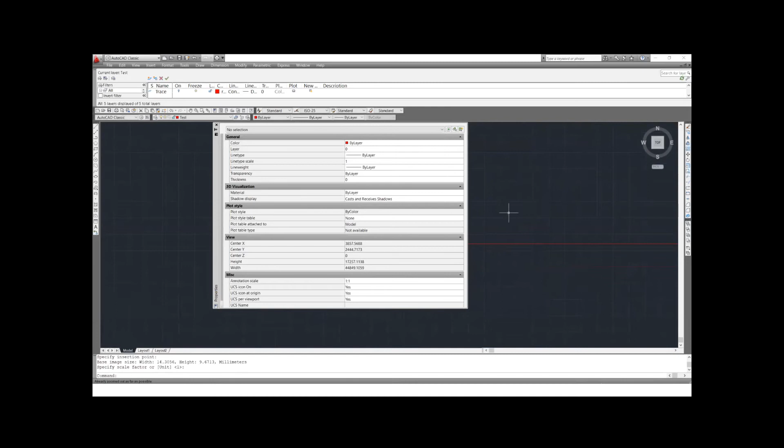It shows me a little preview, what it's going to look like. Where do I want to put it in? Well, I'll just specify on screen. Okay, so I'll start with there, and this is how big I want to make it. And what I've got, if I close that down now, I should hopefully have a very large view - zoom, extents. So we'll get the extent in, and there we are. That's my Walt Mooney baby ace. That was imported, as easy and as quick as that to get that on board.

It really, these modern CAD tools are really much easier than they used to be. When I started working with CAD, it was on DOS-based systems, and they were awful, absolutely awful. Right, that's the end of the quick CAD tutorial. So I'll get rid of that. I'm not going to bother saving it because I don't want to cock up everything I've already got.

Right, moving forward. Now after all this, you can see how I've actually pulled this together. So I basically created, for this test purpose, a very simple drawing. I put it into colours. I picked the wing section from the block, Former 1 from the block. I've got a square, a circle with a pentagon inside it, and they were just drawn by freehand, by the way. And that's what we're going to burn. But I'm not going to burn the yellow ones at the top.

And the reason why I was going to show you setting fire - and I thought, this is a bit stupid, you just take my word for it. It does set fire, you can set fire to it. I was going to go full power on those, and get a real bit of smoke in there. But that would be a bit crazy.

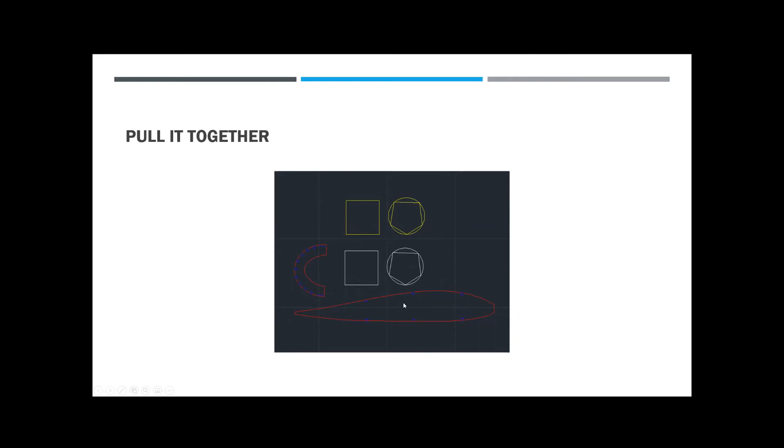No point in doing that. What I've got is one layer of red outline for the outline, blue for the spars and the stringers, and these in white are my test pieces, which I use to test the wood.

So I basically pulled this in. It's a DXF file, I opened it up in Lightburn as a DXF, and that's one thing I haven't got loaded at the moment. I've got a demo version of Lightburn on here at the moment. I've only got one license, and that's on my shed PC. So Lightburn is just loading.

Okay, go back to that. So here's Lightburn. Okay, no, I didn't know that was open. File, open recent projects, and here's the demo one. Okay, you saw me, sorry, I should have opened it, showed you file open recent projects. It starts off as a DXF file, but once you've actually got this working, it actually saves as what's called a Lightburn project. It doesn't break your original DXF file.

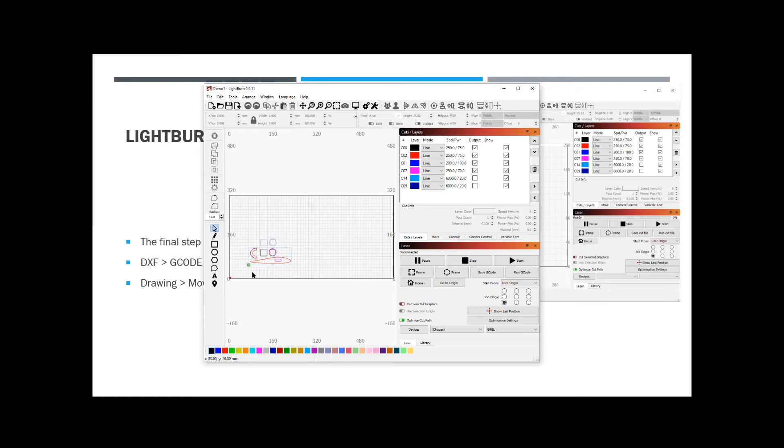So we've got Lightburn here, and what this is going to show you - we're getting now to the fun bits, we're going to set fire to some wood. It creates, remember I showed you about creating layers - well, the great thing about creating layers is now in Lightburn, I want to set these layers slightly different, so I'm going to set the speed and the power.

So double clicking on the color, I can set the layer color, which is black. Okay, I'm going to run it at 250 millimeter per minute, I'm running at 75%. I'm going to cut through mode - I'm not sure what it does in this, I don't think it's anything for me.

Okay, I've got no kerf offset because I'm only using the black one, the black lines here, which are these two here. I'm not bothered about kerf, they're for a test. So I haven't put any kerf in, but I'm going to use 3 passes to test that it's going to cut okay.

If I look at the pink, which is on the inside here, which is the inside piece, I'm going to run this one at 250 millimeter per minute, 70% power. I'm running a kerf of minus 0.4 millimeters, so I'm going to come in almost half a millimeter from the inside. I do not want to touch the black.

One of the things I've learned is we want to avoid charcoal, burning charcoal, because what we leave behind when you cut is charcoal, and charcoal burns very, very well. I'm doing 3 passes.

And on the red, you can see you've got the guide here of it now - 250, 75. The blue ones up here I'm not going to use. I've highlighted these sections, and it automatically defines the start point for the cut. Okay, this is the control panel, if you like.

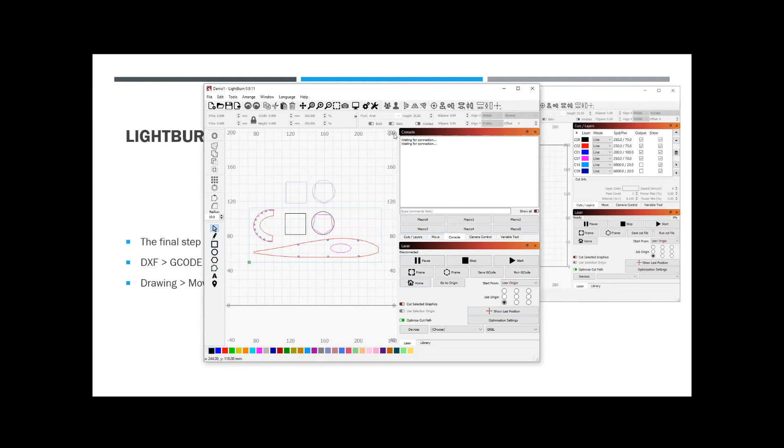So we'll go back to my presentation. So that's a little overview of things.

Now I mentioned G-code. G-code's interesting because G-code is actually now driving the machine. What Lightburn does, Lightburn takes your DXF file, then it takes us, right, you're going to draw this to - I've decided, this machine runs GRBL, and what we're going to do is now a series of commands.

So this is what it looks like. Don't have to remember this. G00 says we're moving in a straight line, we're fast, with lasers turned off. G17, we're going X, Y only, we're not using the Z axis.

G40, we're compensating for curves. If you don't compensate for curves, it draws the curves as a series of straight lines. So what it basically does is it's clever enough to say, we'll draw this curve as a curve rather than a series of straight lines.

We're working in arcs. What units are we working in? We're working in millimeters, G21. G54 sets the coordinate system, okay, where you're going to your X and Y. G90, absolute positioning turned on.

What we're going to do now, we're going to a fixed point on the bed when we start off. Then we're starting off at a G command, go to X0, Y0. We're going to start off there, at the home position, which was the green dot on the diagram I just showed you.

G91. Now from that point on, we're going to incremental positioning. So once we get to the G0 command, we're going to say 10 millimeters in, 20 millimeters to the right. From there, we move to relative position, so we move 10 millimeters up, 10 millimeters left. We're not moving to absolute values.

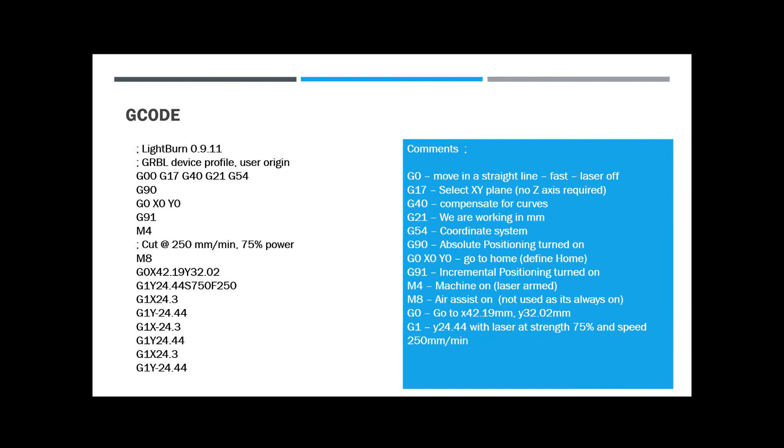I'm going to give you a demo. I'm not going to talk this through. You just sit and watch and be captivated.

I hope you can see it. I hope this video holds on. We're going to start it off. You can see it now moving straight out. We're going to draw the square first.

So we're moving it in the square over this side, and the laser's turned on. It's quite bright, you can see everything went very dim then as I tried to compensate for it. You can also see, looking at it, when it gets to the corners, the laser goes off and comes back on again. So we're no longer setting fire to the corners of the wood.

And it's doing this 3 times. It's going to burn everything that you can see on the left on the screen. So it takes a little while. So I thought it'd be a good idea now, while it's doing this, you're captivated by it, there's one thing you want to watch out for later on.

It's not particularly obvious now, but you can actually see the cone of light. You see, it's only tiny, it's not like it's going... I exaggerated in my diagram, but you can actually see quite clearly it's thicker there than at the point here.

And you see the smoke, by the way, coming up, being blown away as it's caught in the light. So my little wafter over there is just wafting it away quite nicely.

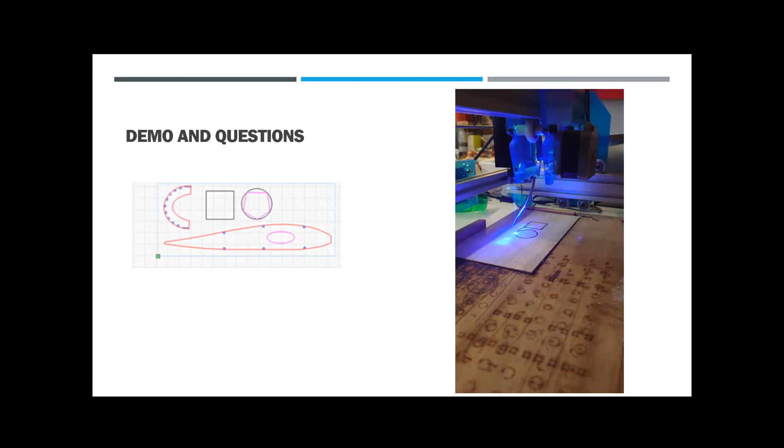I've got to put my hands up and say I'm not exactly Mr. Safety. I did put the glasses on originally, but my problem was I couldn't really see what was happening, so I took them off. I just make a habit of not looking at it. It's far brighter than what you can see in real life - I'd say probably 100 times the intensity. It's very, very bright.

Martin, I've got a question for you. I sit in front of my laser most days - what are you doing for ventilation extraction? I can tell you need to give your lungs a bit of a favour from inhaling that stuff.

Sorry about this, I just realised my camera's turned off for some reason. I'm struggling, sorry. Anyway, never mind, what's happening? Can you update what's happening now with this wing rib? The wing rib is actually in 4 parts because I cut little gaps where the spars were. Never got around to finishing it because I didn't want to be burning a square on top of the square - it becomes a little bit odd. I've actually got the parts in front of me at the moment, so I can't turn my camera back on. Let me think... no, it won't let me do it.

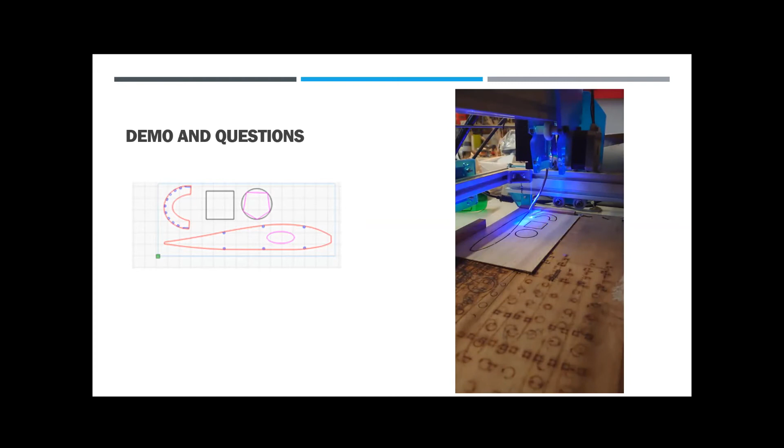Can I suggest you try and ventilate your workshop, because believe me, it plays havoc with your throat after a while. Oh, I never mentioned that - well, it's actually a good point. One thing you can't detect from doing this, you can't get the smell. These things stink when they're cooking - an unbelievable smell, especially because my baseboard, my sacrificial layer, is actually plywood, and it gets the resin - the resin really, really reeks. I'm going to put an extractor fan in to get rid of the smell and stuff like that, probably sooner than later.

So anyway, we're cutting the spar box at the moment, we're going to crack through that. I'm only doing one pass on the spar slots, not 3, because I don't want my spar slots to be too big - I don't want them to burn. I'm quite prepared to open them up, so we'll cut the long runs now. Let them crack on.

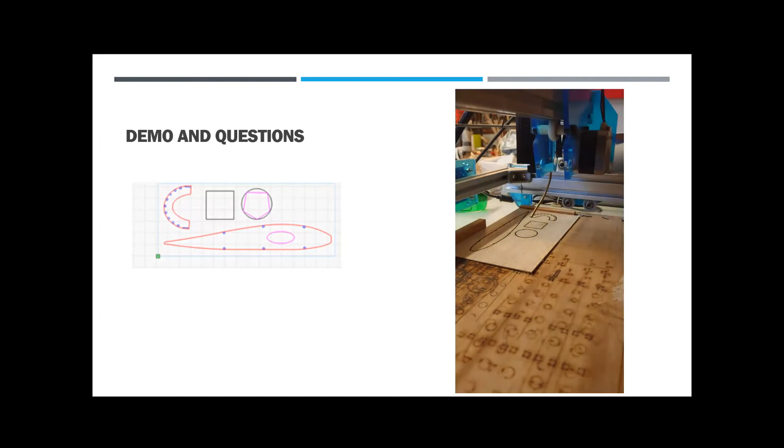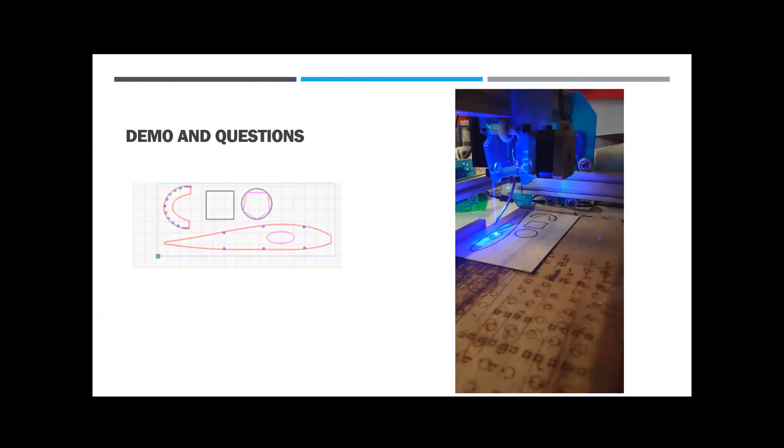Martyn, I'm still struggling to understand the relationship between the G code that Lightburn produces and the GRBL code that the cutter uses. You've got your CAD DXF file that's appeared in Lightburn, and that needs to convert the DXF file as a series of movements. I understand that, and I understand the G code, but I don't understand the interface between that G code and the cutter, where the cutter is using this GRBL language. What happens with GRBL?

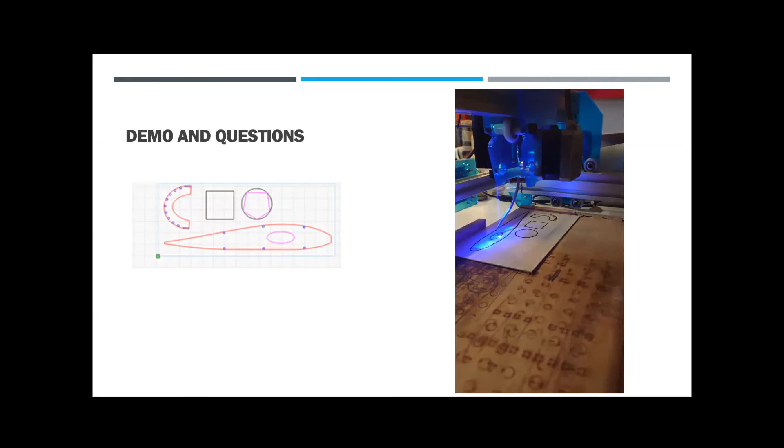GRBL is basically talking directly to the hardware. So with GRBL, we're just saying turn the laser on at this intensity or that intensity. So the G code software is machine independent. The GRBL code tells the mechanics what to do, but it's also capable of understanding what the G code is telling it - it understands the instructions that Lightburn has produced, and translates that itself into the motion of the machine. That's exactly what it's doing - that's the important thing about it. The G code is not machine dependent. You need something which I always think of more like firmware, in the old days of firmware, which sits on the machine itself - it's almost like the operating system for the laser cutter.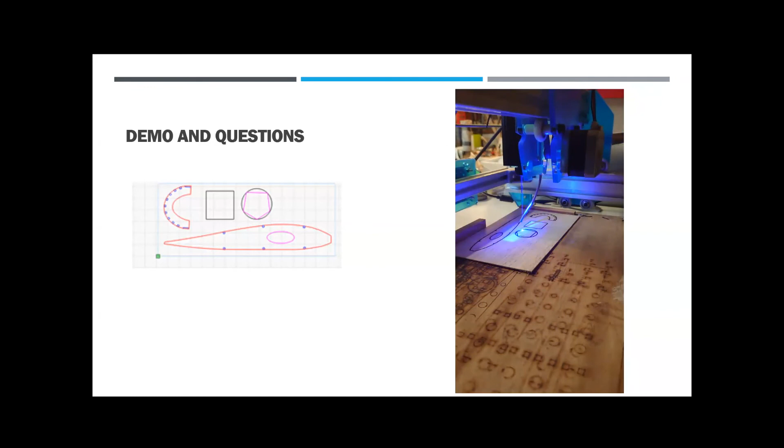So does GRBL talk to anything else other than G code? Does GRBL interface with any other form other than G code? It does, but it depends on the machine itself.

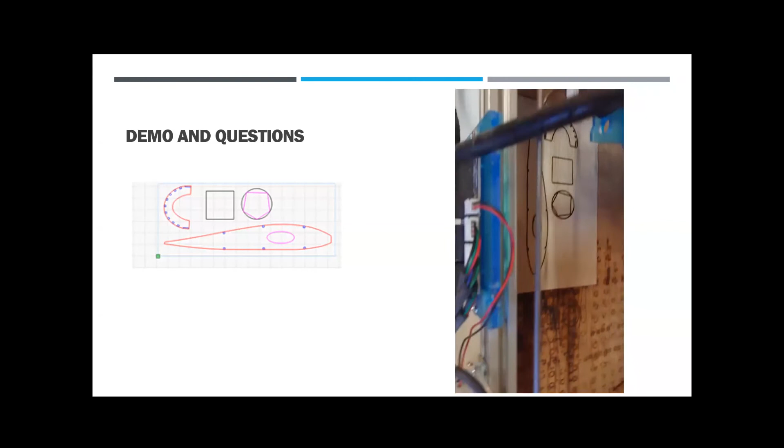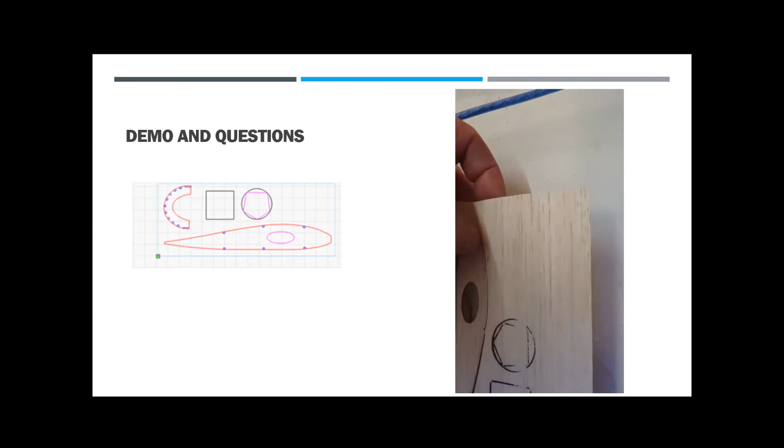Okay, so this is just coming across now - there's my cuts, and I pulled it out, and you'll see what it looks like. So that's it from the top. I think those cuts look pretty neat, nice and tidy. That wing rib comes out just about perfect, and as a tip pops out, the lightning hole pops out of it. You can see where the harder wood is down the center, I've just had to finish off with a scalpel, but it's literally tiny - you can see I've gone through. I've got one stringer there which actually overcooked slightly, but that's basically what happened to it. I've got that part here - I'll show you in a second when I switch this off.

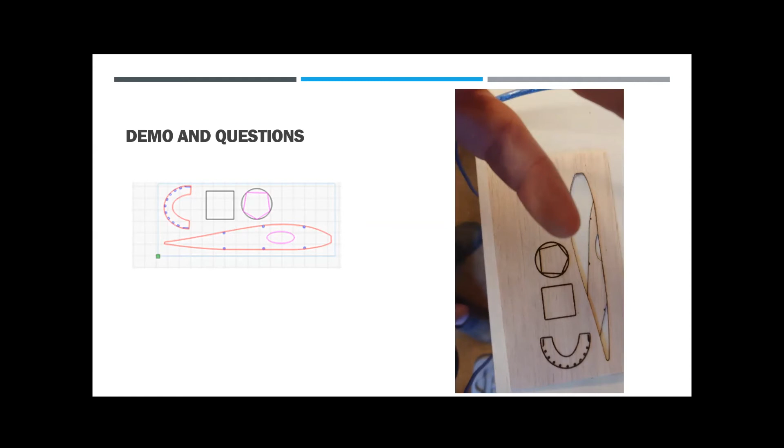So that was a quick demo of what it looks like when it's working.

Right, this is my shed. I've been asked, as I've got a few minutes, to show the shed - I'll go back onto my camera afterwards and show you the parts I've actually done, but I'll do this now. This is my garden, by the way, so I'm going to walk through this - I'll turn the audio off, and here it is.

So here's my garden, 9:20 Sunday night - there's my motorcycling mug on the chair with the piece missing on the back, and there's my shed. It's just going dark. So here we go, be horrified now - it's 13 foot by 9 foot, it's full, absolutely jam-packed full. I can't hardly move in there. So we started off - anything that can go on the door goes on the door.

We've got it there, as you can see - my 3D printer, and my laser with a PC with it, that's where it sits. The PC lives in there now, that's my old desktop, my old laptop PC. Storage underneath - I've got glass fiber kits under there, there's balsa, there's jigs, there's plans over in the corner, plans coming out your ears in there, plans piling up, the chippy there - Danny will recognise that one.

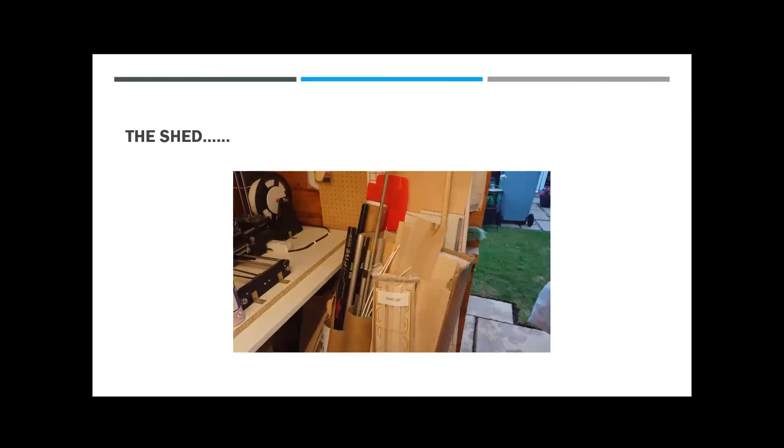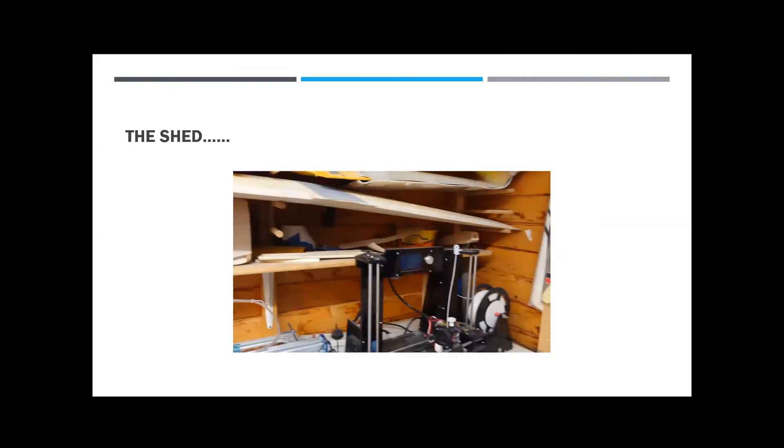Okay, scraps of balsa - that's my main balsa supply. That doesn't really do it justice, there's probably about 150 sheets of balsa in that pile. There's a kit there for a mass build for the model fly, which I've started. I've got wing racks up there with bits and pieces in there. I've got my Fury down here, that's going on my bench very shortly - as soon as I finish one of these two I'm on now, the Fury will be back on the bench. I feel very embarrassed - there's a Swordfish in the corner by there, which was a kit scale I've never finished. I've got a few that I've never finished, by the way - I'm a bit bad like that, a bit naughty.

So, come on, move on a bit, Martin. What am I waffling on about? I was going on about the Swordfish, I think.

Right, there's the Fury. There's two boxes. I've got peanuts in it. That's a PSS F86 Sabre, which is getting very close to being painted. In fact, it's been painted silver since I did that.

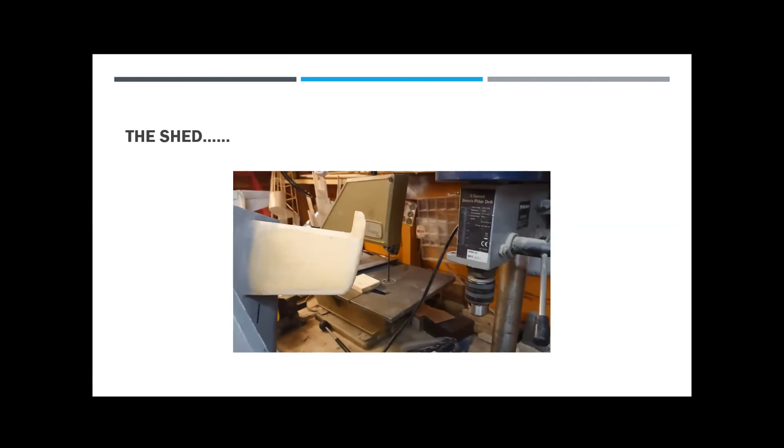Tailplane for it sat there. Pillar drill straight from Wickes, 55 quid I think it was. My bandsaw, that's 52 years old. It's a BBS 20, it was my dad's, and he bought it when I was 12 years old.

I remember it when he came in. My dad used to buy lots of tools. Never had a clue how to use them, but he used to buy lots of tools, some of which I've managed to acquire from him over the years. He's passed away now, so he probably wouldn't miss them.

I've got Delatel down there. That's my naughty corner, by the way. That's modelers that have failed in one area or another or are in for repair. So I've got my Rearwin Speedster in the back there, which is now just about ready to go, but the wings, I've got a problem with the tissue on the wings. And I've got the Lysander there, Andy.

That's my free flight scale, Bücker Jungmann, I think it is, like a Jungmann or a Jungmeister. But it's probably going to go to, it's going to be a free flight scale, but it's electric powered, and I don't want to put radio control engine cutoff into it, which I'd have to do. I think it's not what free flight's about for me, so I'm going to probably make it to radio.

Those vinyl masks there are for the Rearwin Speedster and for something else. I forgot what else. Oh yeah, for the Delatel. I'm going to repaint that.

There's my peanuts. So there's the Bock, by the way. That's what the Bock is. There's the Baby Ace, the Bock.

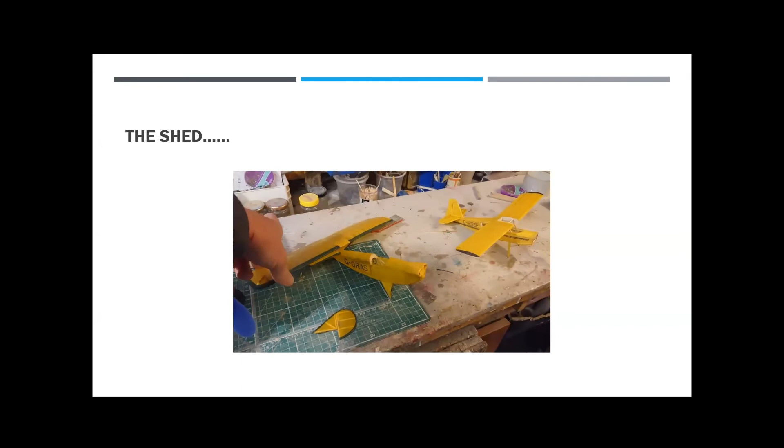They were hand cut letters and they're nowhere near good enough. That's why I never bothered finishing it. That's hand cut as well. That's my own design. That's a Citabria

champion again. It's nearly finished. Scale rib spacing. It looks all right. I'm quite pleased with that, to be honest with you. I've got a lot of work's gone into that. It's taken me a long time.

I built it on holiday in Italy last year and then covered it and finished it over here in the UK. So I take a building board every time I go, everywhere I go on holiday, so to say.

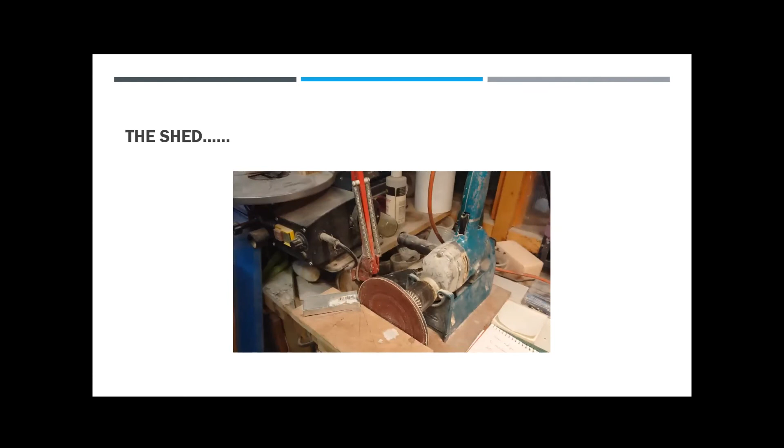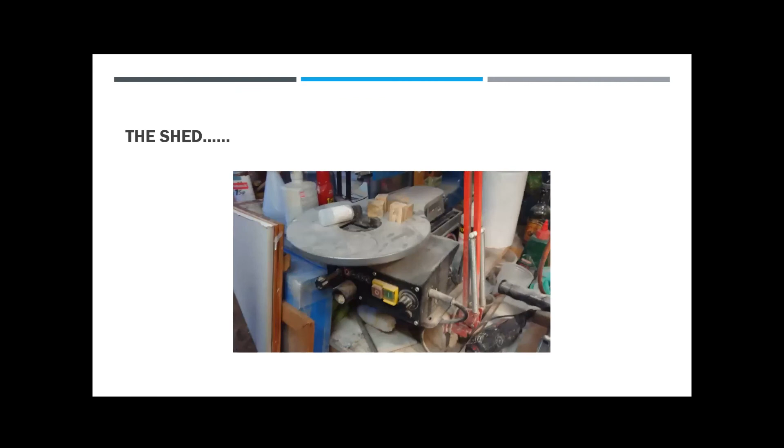Another 55-year-old Black & Decker in blue, pre-orange days, I think it was, with a sanding disc attachment on. That's my main sander. Behind that, there's a scroll saw, which I don't use very much at all. Bit of a disappointment. I remember asking somebody, how do you keep the dust down? I have a massive problem with dust in there.

There's building boards everywhere, by the way. That's my average size building board. I'll turn around in a second, look back down my bench, and you'll see my 2.5 metre building board, which is what I do the big gliders on. It goes right down to the corner. That's a decent sized building board, that one, a proper one.

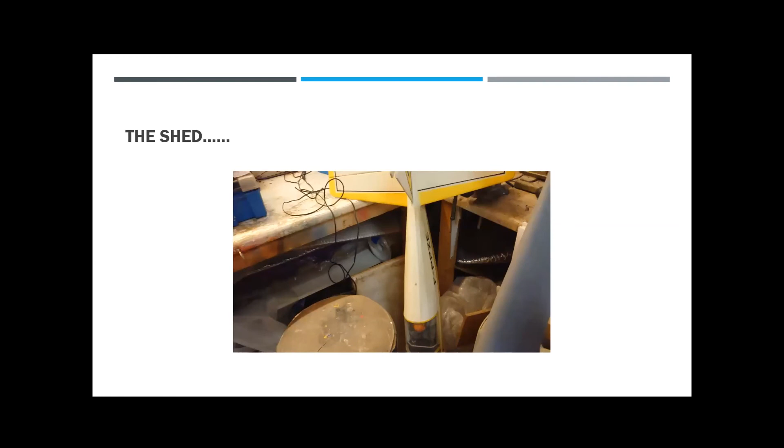That's my spray area where all my tools, spray bench and paint underneath. I've got a couple of cupboards to the right, which I'll go back to, where my radio gear and engines are in and stuff like that. It's just a right blooming mess, as they say.